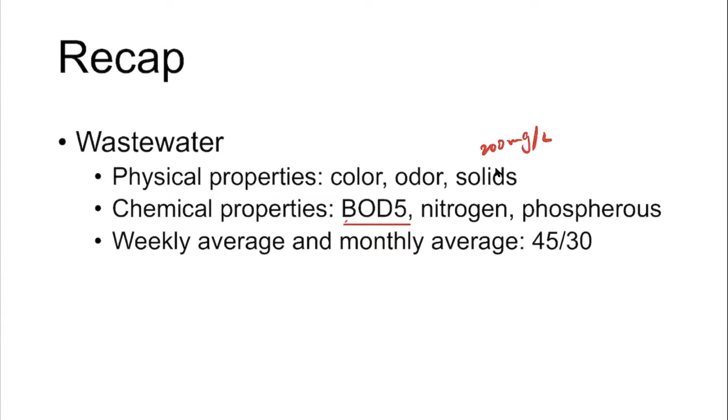And then in terms of the chemical properties, there are a lot of organics, so we have to measure the BOD5 and put regulations on what the BOD5 should be after we treat the wastewater. There are also nitrogen species, like ammonia or nitrate, which are major nutrients for algae bloom, and there's also phosphorus in the wastewater. So we have to deal with these nutrients before we discharge it back into nature.

That's why there are regulations. The EPA has regulations on what the concentration, or standards, should be for wastewater before we discharge it. A quite easy number to remember is this 45-30 number: 45 milligrams per liter, for both the BOD5 and the suspended solids.

So the 45 is the weekly average, and the 30 is the monthly average. We also introduced why these two average values are different—mainly because there are fluctuations in these contaminants. For example, BOD can have high values or low values. So if doing a weekly average, and it happens to fall in a high concentration range, we should use a higher standard. For the monthly average, we can use a lower standard as the regulation.

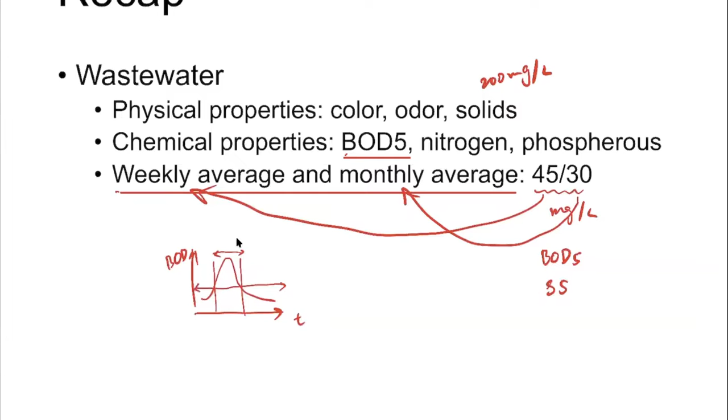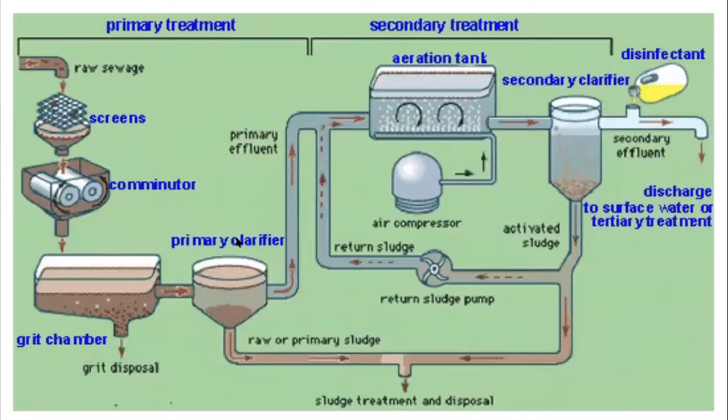And then we watched a video about how the wastewater treatment plant works. For this process, we mainly divide wastewater treatment into several stages: primary treatment and secondary treatment, and for some wastewater treatment plants, a tertiary treatment. So basically it's stage 1, 2, and 3 for wastewater treatment.

For stage 1, what happens is it directly deals with the raw sewage—the dirty wastewater. We pass it through the bar screens to first remove the larger particles, then through the comminutor to cut it into smaller pieces of solids, and then through the grit chamber to remove these medium-sized particles.

And then for these very small particles, we pass it through the primary clarifier. The primary clarifier mainly removes particles based on gravity—basically the particles are large, and because of gravity they settle down to the bottom and get collected.

And then the relatively clean water coming out of the primary clarifier—for the federal requirement, we have to do the secondary treatment process, meaning we pass this relatively clean water into a secondary treatment process, which is mainly the aeration tank.

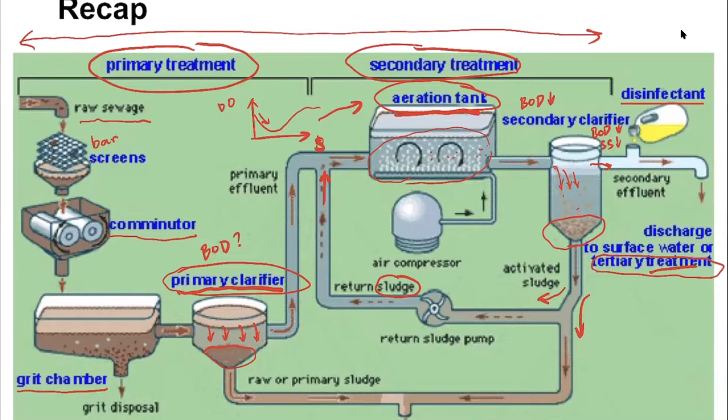This is the main idea of this secondary treatment. We're basically providing some bacteria with an unlimited amount of food and oxygen so that we can reduce the concentration of the organics. We're going to talk a little bit more about these different steps later in this class.

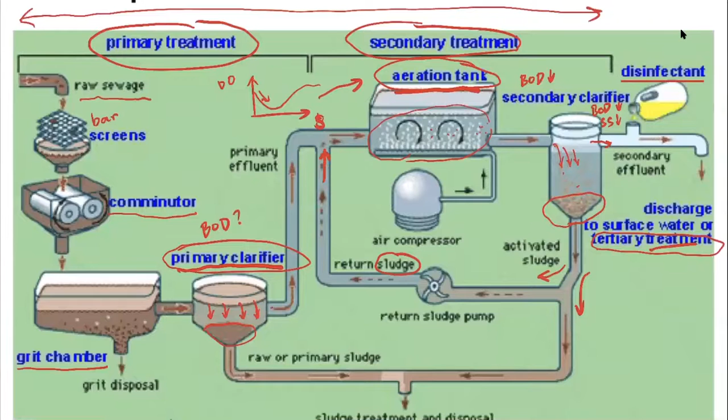Before that, since we already talked about the wastewater treatment plant, which is basically a centralized method to deal with the wastewater, we also need to introduce a counterpart that's not used for centralized water, but for distributed water. Those are called the on-site treatment systems.

The major difference is that a wastewater treatment plant is built nearby a city, dealing with wastewater coming from households or nearby industrial plants. But if people are living in rural areas, it's going to be very expensive to transfer their wastewater to a plant nearby a city. That's why people rely on these on-site treatment systems. It serves around 25% of the population in the United States, while 75% is served by wastewater treatment plants - so on-site systems serve a considerable amount of people in this country.

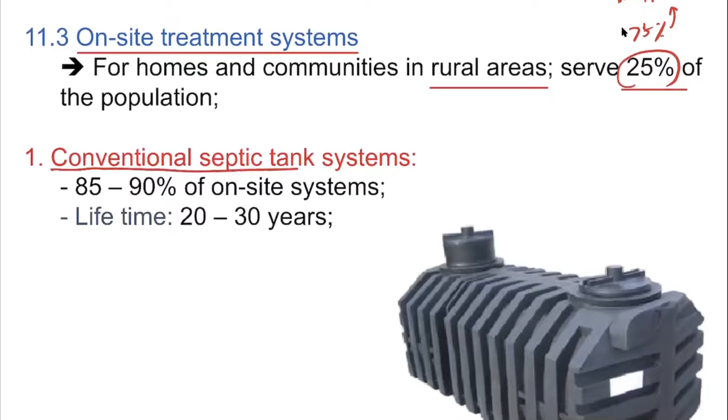Among all the on-site treatment systems, the conventional septic tank system is the most widely used, occupying around 85 to 90% of all on-site systems. It's also a very simple setup - it has one inlet and one outlet.

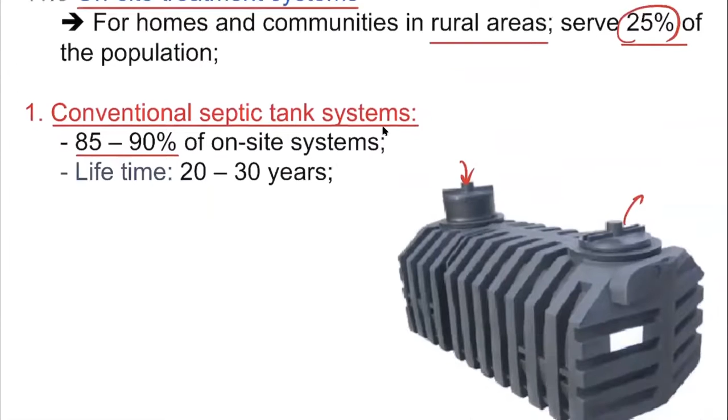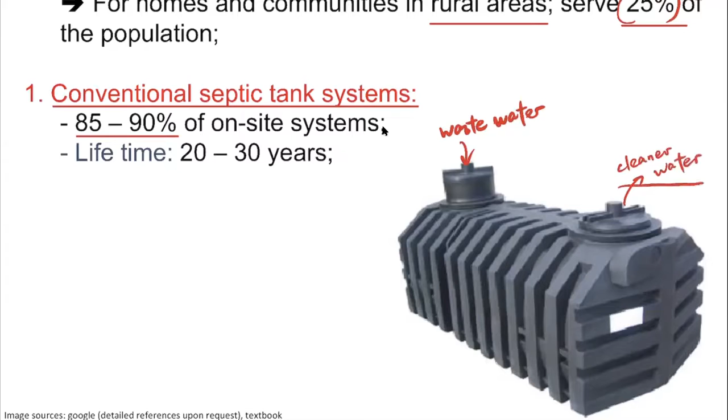You have dirty water in, which is the wastewater coming in, and then relatively cleaner water coming out. But of course this water is not going to satisfy any standard - it's definitely not drinking level. These septic tank systems generally have a lifetime of around 20 to 30 years.

The way it works is this tank is separated into two different regions, called two different compartments - you have the first compartment and the second compartment. The principle is very easy, it's just using the gravitational settling of the particles.

What happens is we have the wastewater introduced into the first compartment, and since we have a lot of suspended solids - very large particles - they're going to settle down onto the base. We call this sludge. Normally these tanks have a relatively large volume compared to the flow rate.

Let's imagine this septic tank is just serving one household - the wastewater generated from the household is not going to be very large in quantity. Because of this very large volume, the residence time of the water is going to be very long, so there's enough time for the particles to settle down onto the base.

And then in this first compartment, they can separate into different layers. You have the sludge layer at the bottom. You have the scum layer, which are some contaminants or pollutants that have lighter density, so they can basically float on top. And then you also have the liquid level. The liquid at the very top is going to be cleaner because the solids are too heavy and they settle down.

So this relatively cleaner liquid can pass into the second compartment, which uses the same principle. The larger particles settle down, and you get relatively cleaner water coming out. So then this is the outlet.

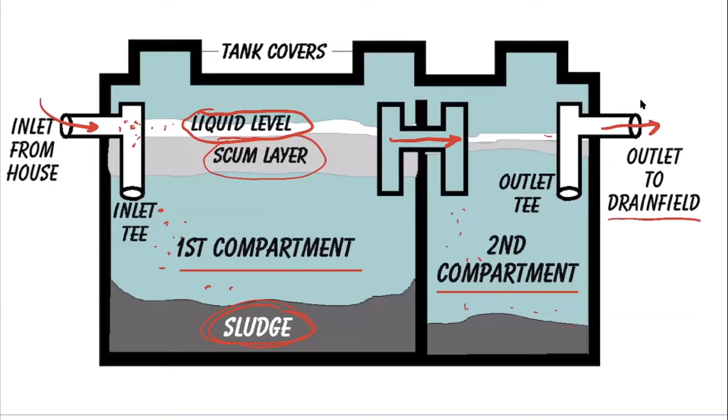After the water is discharged from this septic tank, normally people would just directly drain it, sending it to a drain field. What the drain field means is it's going to pass into a section of soil. The septic tank is normally built underground, and after the relatively cleaner water comes out, it goes into this drain field.

But a lot of the water, or some contaminants, are going to penetrate through the soil. If you recall hydraulic conductivity, this water can further penetrate through the sand layer, the soil layer, and further contaminate the groundwater.

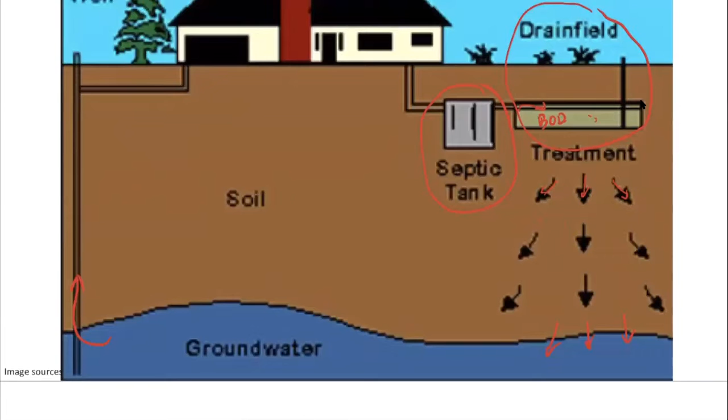And this is something we don't want to happen, because if there are some BOD or heavy metals in the discharged water, and people normally use the groundwater as their drinking water, then if the contaminants pass through here, we will have a problem.

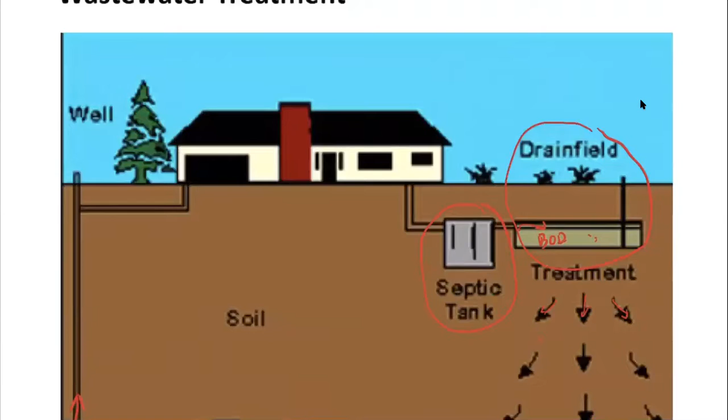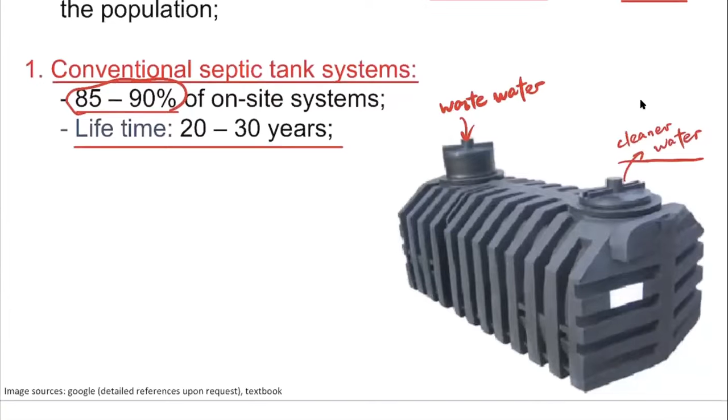So that's why people also try to revise the septic tank system. You can see that septic tanks actually serve a large population, about 85 to 90%. But because it may cause further contamination, people are trying to revise these systems. One example is the septic tank system with modifications.

In the wastewater treatment plant, one thing used to remove the BOD is the aeration tank, which is part of the secondary treatment process. We introduce a lot of bubbles, air, into the reactor and let the bacteria grow and consume the organics. We can use a similar principle here, adding aeration to try to reduce the BOD in the tank.

We can also use the recirculating sand filter system, similar to the drinking water treatment system. You have the sand filter to remove the smaller particles. We can use these sand layers to remove the small or medium-sized particles, while very large particles just get blocked at the top. This way, we cause less pollution to the groundwater, reducing the environmental burden of these very basic septic tank systems.

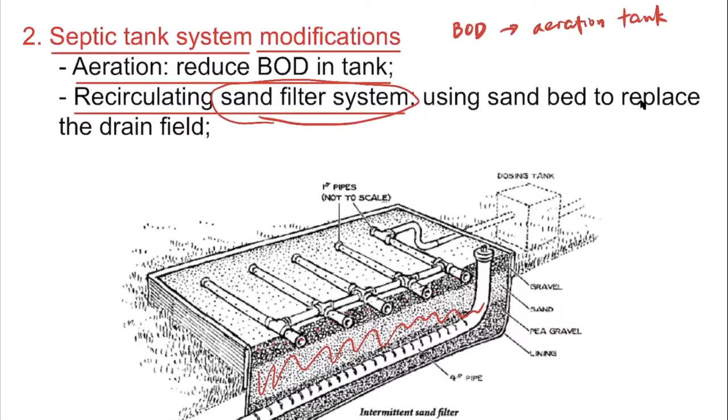Another system we can use doesn't have any compartments at all. This is generally for relatively cleaner wastewater, because wastewater has a lot of nutrients, like nitrogen or phosphorus, which we can actually reuse in plants. If we try to grow some crops, we can directly use them as fertilizers. But this also requires that the wastewater doesn't have a lot of organics, so the BOD generally needs to be low.

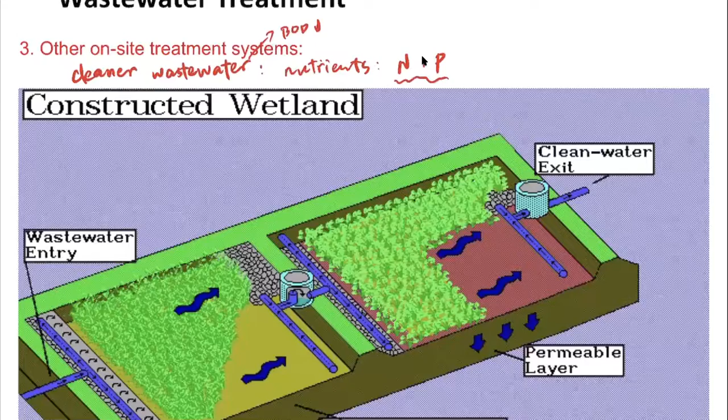So what we can use is a constructed wetland. The wastewater enters here, and we have the first layer, a first wetland growing some plants. The soil here blocks a lot of the particles, and these plants can also reuse the nitrogen and phosphorus, growing upon this wastewater.

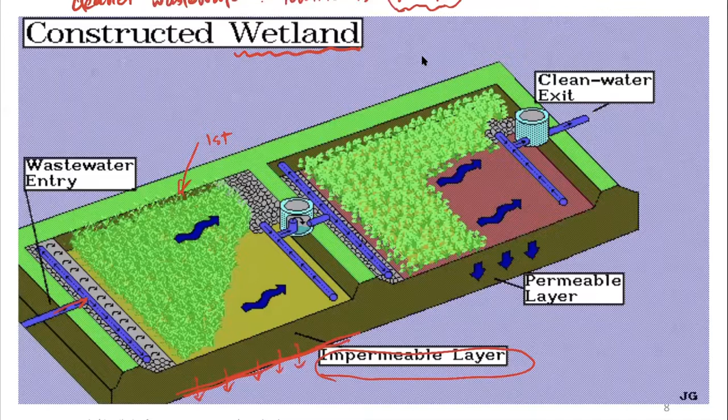At the same time, for this first compartment or soil layer, we use an impermeable layer, meaning at the bottom of this wetland we use rock that doesn't have any porosity, so it's very difficult for the water to penetrate down. If it's not easy to penetrate down, we can collect all of this treated water and send it into the second wetland.

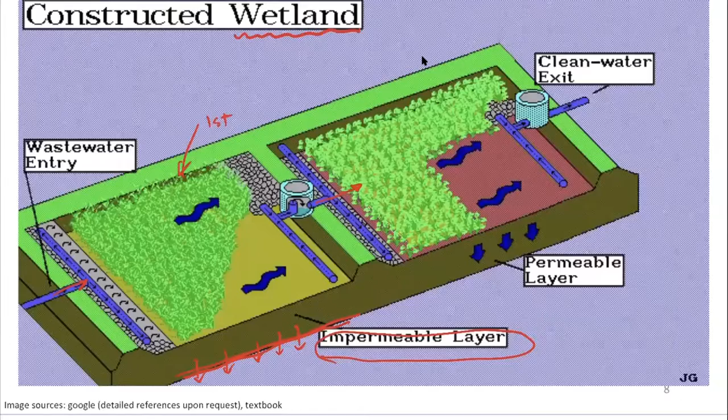In here we can further reuse these nutrients. And then here we can use a permeable layer because most of the solids and heavy metals are already trapped by the soil. There's no way they can further penetrate or go into the second wetland here.

So in this way, we're going to discharge relatively cleaner water down to the soil. So the pollution impact to the groundwater is also going to be smaller, right? So this one doesn't have any compartment here.

And further, there's a modification that's called the baffled bioreactor, or the BBR. The BBR generally looks like this, kind of like a trailer or a shipping box. Inside, it has a similar structure compared to the septic tank, but it's a little bit more complex in terms of how it treats the organics and how it treats the nitrogen.

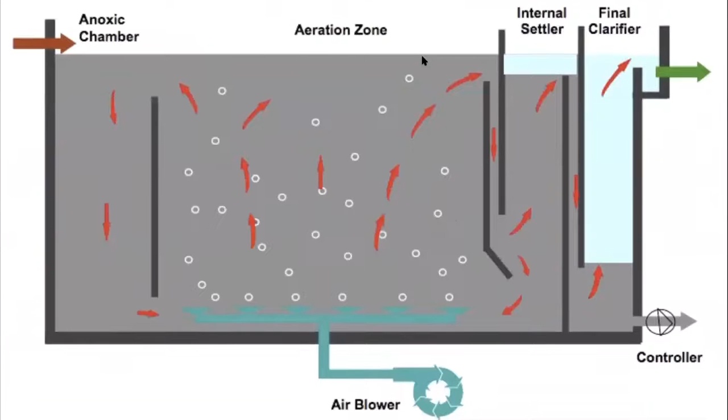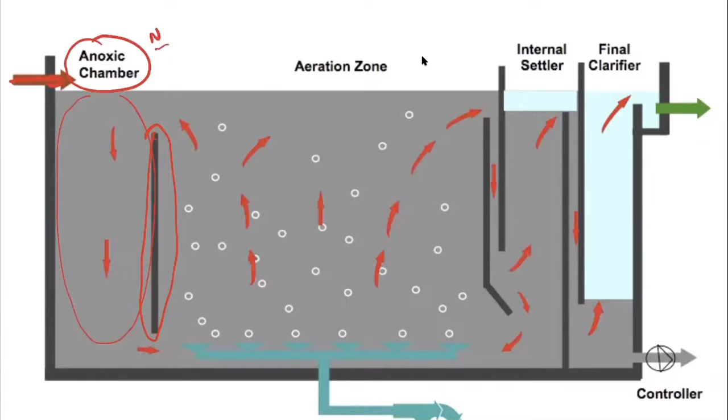In the BBR, people build different channels, different baffles, to regulate the flow of the water. For example, the wastewater comes in and first goes through this anoxic chamber. If you recall the metabolism section where we introduced ecosystems, the anoxic process is basically the process that consumes nitrogen. So the first process deals with the nitrogen species to reduce the nitrogenous pollution from the wastewater, converting either ammonium or nitrate into nitrogen gas. Then the water flows into the second compartment, which is the aeration zone.

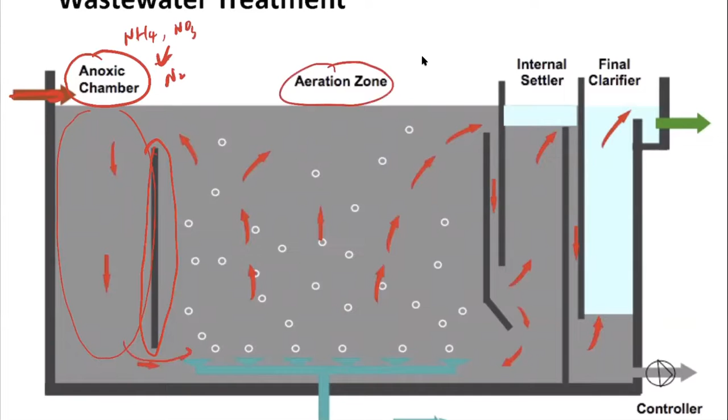This is similar to the aeration tank in the wastewater treatment process. We can bubble a lot of air into this aeration zone and also introduce bacteria inside. This is going to remove the BOD in the wastewater.

And then we have these channels to further regulate the flow, so that the water can only go from this channel here, then down, then up, and then down again. Basically, we're elongating the trajectory of the water, so it can stay longer and have more time for the particles, let's say the suspended solids, to settle down onto the bottom.

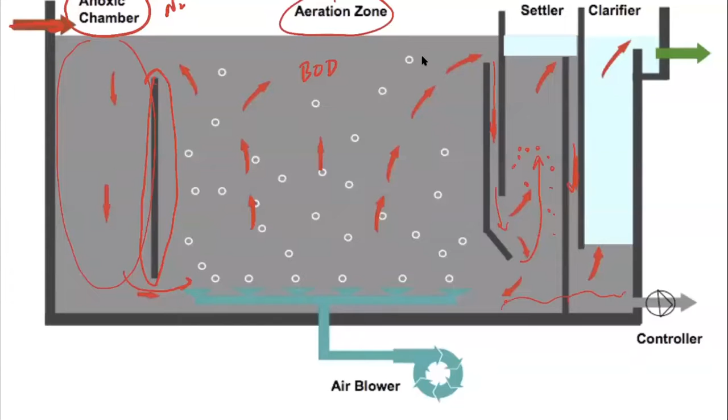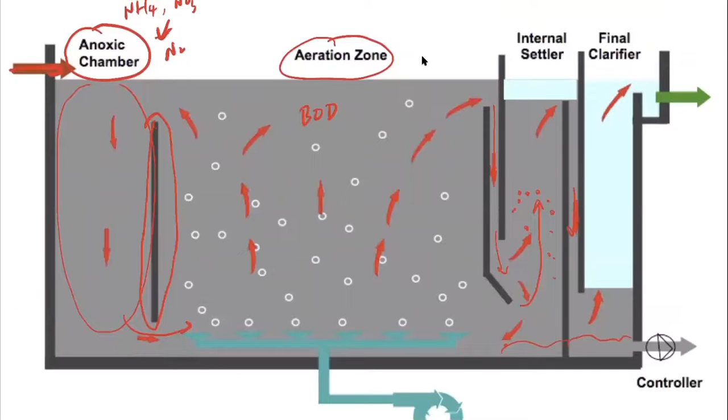Finally, after the water passes through all of these baffles and channels, in the final channel or final clarifier at the top, the water quality is much cleaner compared to what's coming in. So it's very similar to the septic tank, except that you have much more processes happening within this single chamber.

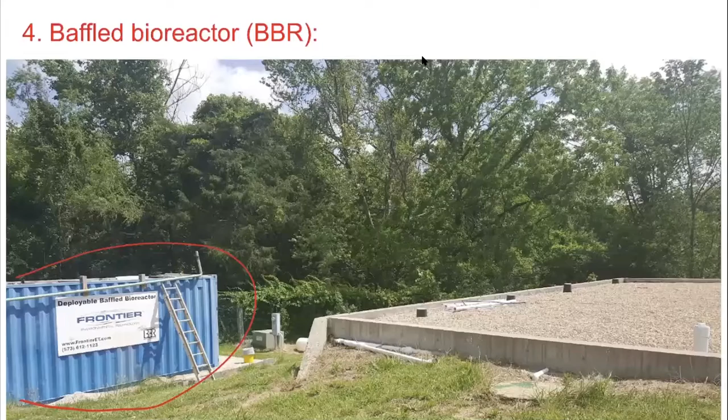I have to mention that this idea of the BBR is patented by Dr. Jianmin Wang in our department. He has a company that actually produces these baffled bioreactors, and it's being applied in many, many facilities. His company is called Frontier Environmental Technology, so if you're interested, feel free to hop on his website and take a look.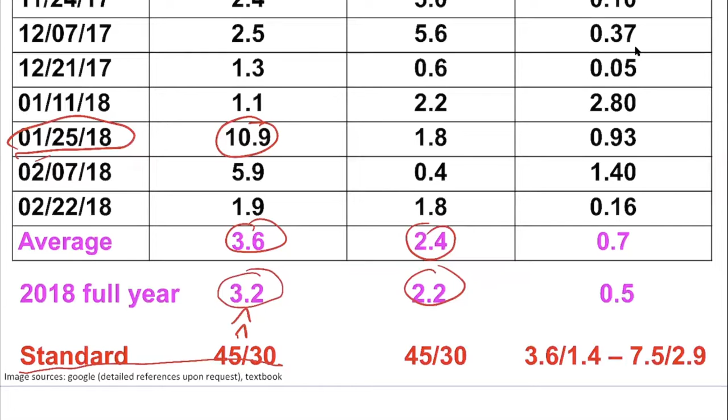So not only can it treat the BOD5 and suspended solids, as we mentioned, it has the anoxic chamber, so we can deal with ammonia and nitrogen species. The concentration is also relatively low compared to the EPA standard.

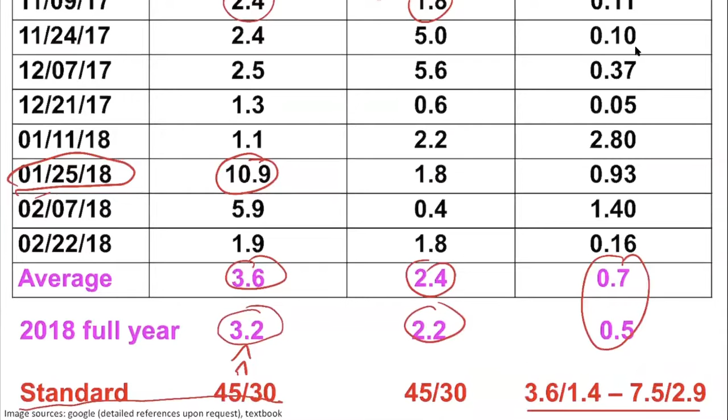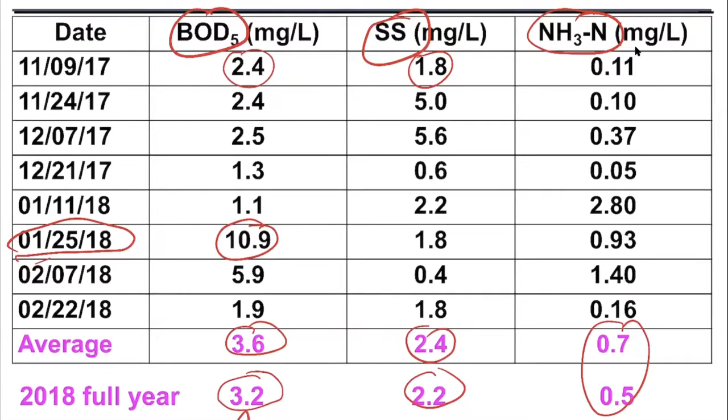So basically, these are all the on-site systems. As you can see, the on-site system, because it's serving less of a population and also in terms of capacity, it's smaller since it's normally just serving one household. So the process is relatively more simple, and at the same time you can have different processes, or similar processes compared to the wastewater treatment plant, and combine them into this compact system.

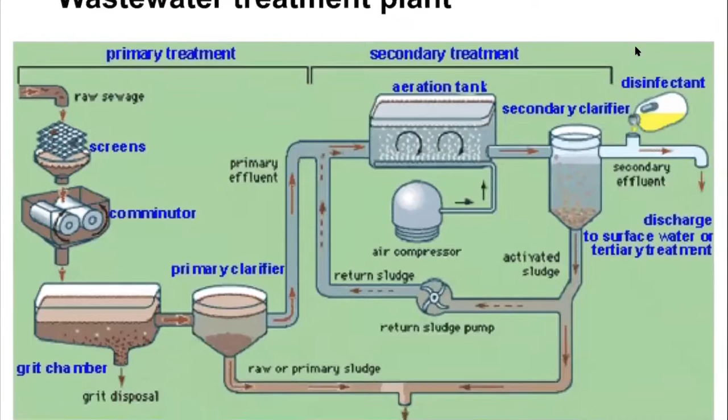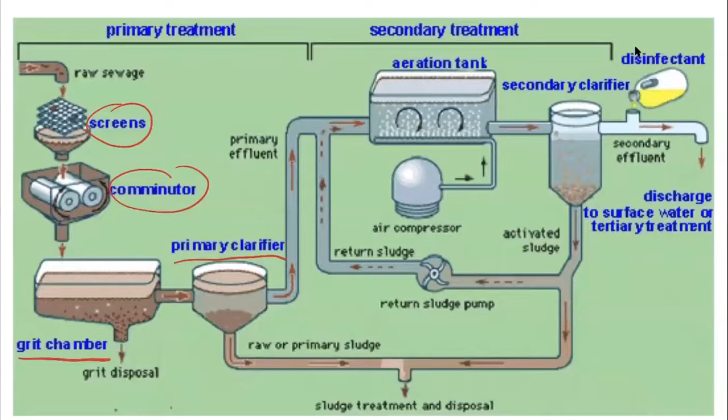So now let's come back to the wastewater treatment plant, and we can spend a little bit more discussion on each of these processes. As we mentioned, for the primary treatment we have the bar screens, the comminutor, the grit chamber, and the primary clarifier. And for the secondary treatment, we have the aeration tank and the secondary clarifier. These are the major processes we're going to talk about.

So first is the bar screen, or bar racks. This is generally the first stop of the wastewater treatment plant. As you can see, these bar racks basically work as filters, except that they have very large openings.

It's 5 to 40 millimeters, which is a very large gap here. This is mainly dealing with the larger species or larger contaminants.

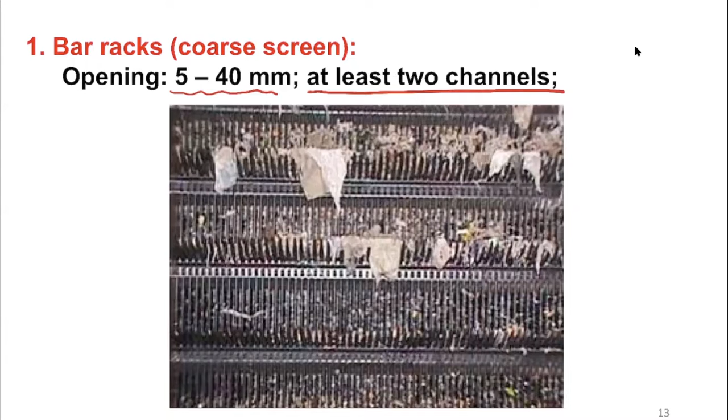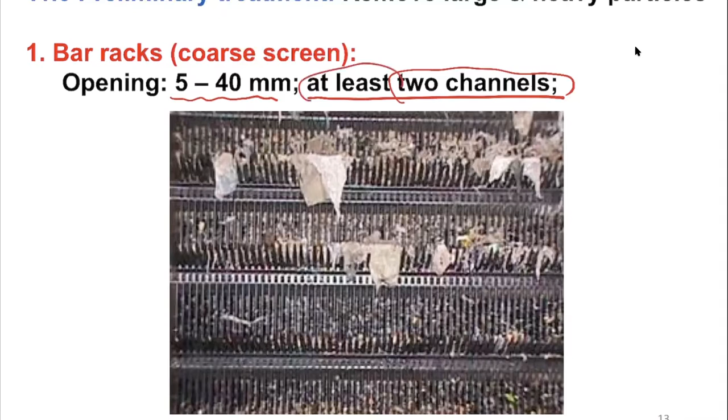At the same time, people need to build at least 2 channels because it's very easy to block one of the channels—you never know what people are going to dump into the wastewater stream. So there needs to be at least 2 channels, mainly because if one channel gets fully blocked, the other channel can still work. And if you have more channels, that will be even safer in terms of treating the wastewater.

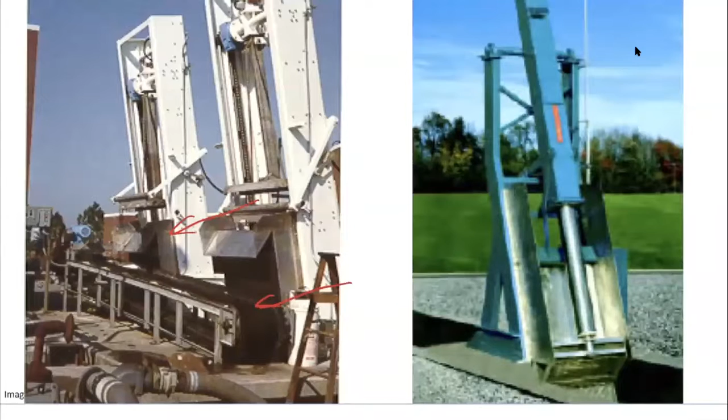Here it's showing 2 bar screens or bar racks, so the wastewater can flow from either of them, or both at the same time. You can pull them—basically dip them into the water—and after some time, when you feel it's blocked, people can measure the flow downstream of this bar screen. If the flow is too little, then you're going to pull this bar screen up and remove these larger contaminants. As I said, you never know what people are going to dump into the wastewater.

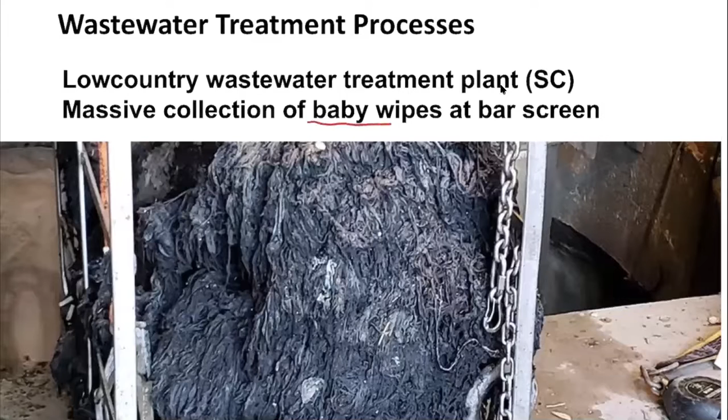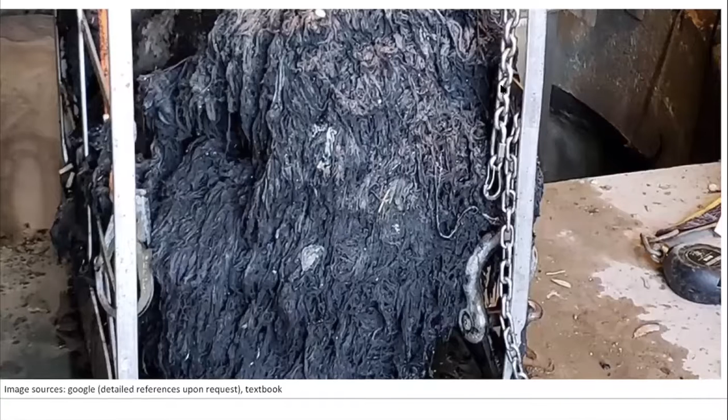Here I'm showing a picture that actually made the news regarding the wastewater treatment process. In South Carolina, there's a wastewater treatment plant called the Lowcountry Wastewater Treatment Plant. I think in 2018, they made the news because the plant had to shut down, mainly because people found a massive collection of baby wipes at the bar screen. So now you can see what kind of burden this bar screen deals with—the baby wipes are pretty large, and if you have a large amount there, it's going to completely block these screens. Then the whole treatment plant has to shut down all the inflow of wastewater and try to remove these contaminants. So the bar screen is dealing with these larger species.

What happens is, while we're transporting the wastewater through the channel or through the pipes, we can also create a flow that lets the water spin around. If you imagine particles in this wastewater, because of this spinning movement, it's going to create a centrifugal force. So the larger particles spin to the outside of the channel, and here you can have this hopper, basically to let the particles settle down in this collection region. Different designs for the grit chamber have different locations for the hopper—they can also be located here or here as well.

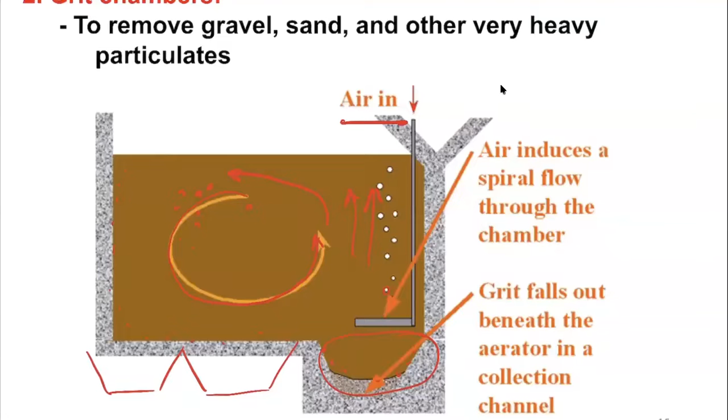The method we use to create this spinning flow is by introducing air from a pipe. If we introduce air in here, we're going to generate a lot of bubbles. The bubbles try to float up, and that's going to drag the water to go up, but the water cannot come out—so the water can only diverge in this way, creating this spinning movement. Based on this mechanism, we can remove particles of larger sizes and further purify the wastewater.

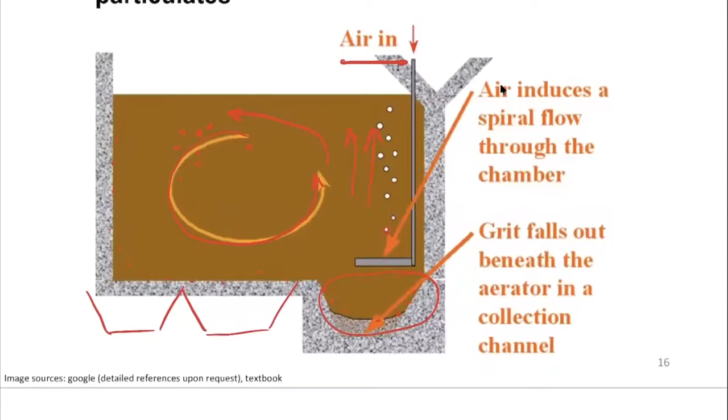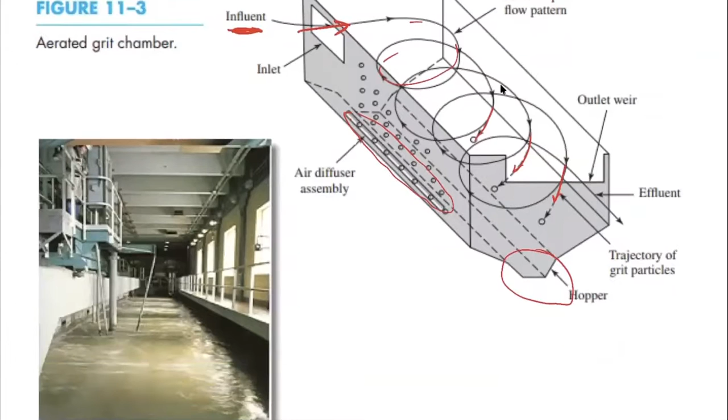Here's how the channel looks: the influent or inflow can go from here, and since you have this air diffuser generating bubbles from one side, you create this spinning movement, and the larger particles get spun to the outside. Then you can have the hopper at the bottom to collect all of these larger particles. You can also imagine this is actually a quite convenient way to clean the water, because we have to transport the wastewater anyway—the water has to flow in pipes. You cannot directly connect this primary clarifier downstream of the bar screen; you have to transport it somewhere else. So while the water is being transported, you can introduce this spinning flow to remove these larger particles.

This picture is showing the grit chamber and how it looks. The water is going to flow in this way, and you can generate bubbles from one side of it, so the water spins the other way around.

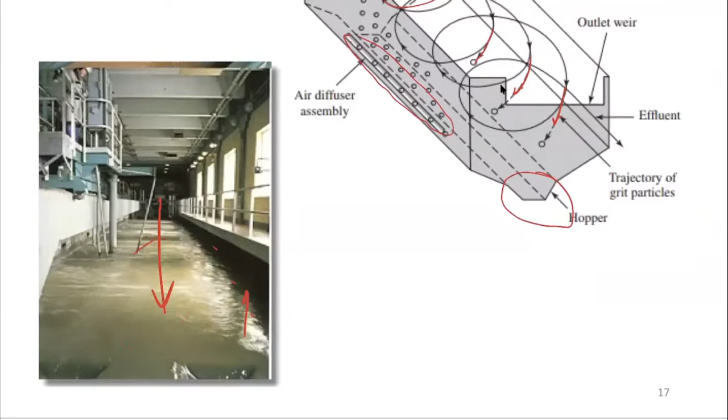Get spun, and then particles can settle down, right? So this is the grit chamber.

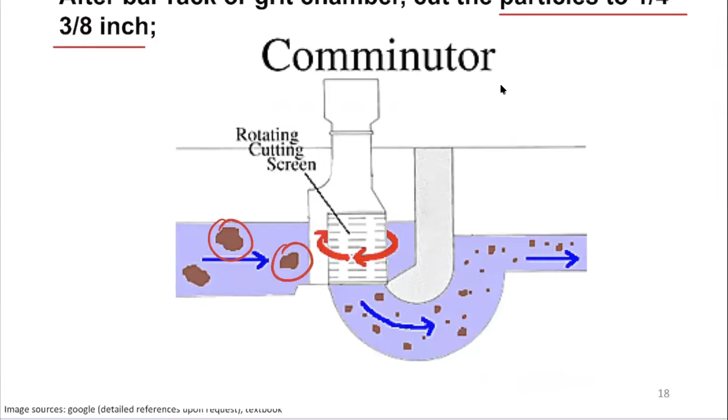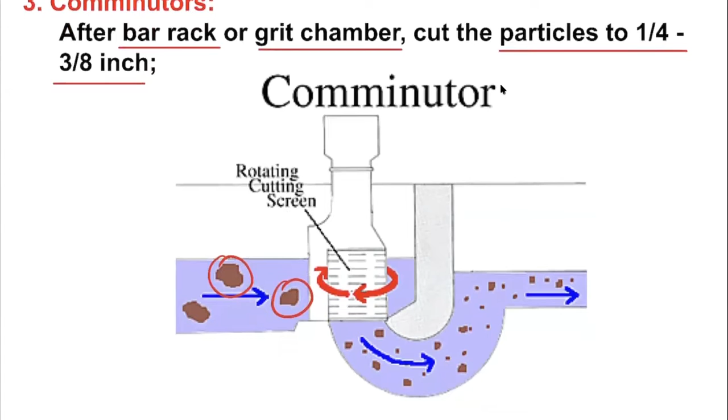There is also a device called the comminutor. The comminutor tries to cut the relatively large particles or particles of medium size into smaller ones, basically cutting them into 1/4 inch or 3/8 inch sizes, crushing these larger suspended solids into smaller ones. The comminutor can normally be placed either after the bar screen or after the grit chamber, depending on how large these suspended solids are. After they're broken down into smaller pieces, we can remove them more efficiently.

In industrial wastewater treatment process, people also design a system called the equalization tank. The main idea is if we try to plot the flow rate of the wastewater coming out of industry, normally these industries work during the daytime and shut down during the nighttime. So during the daytime, you're going to see a peak of this discharge in terms of the wastewater.

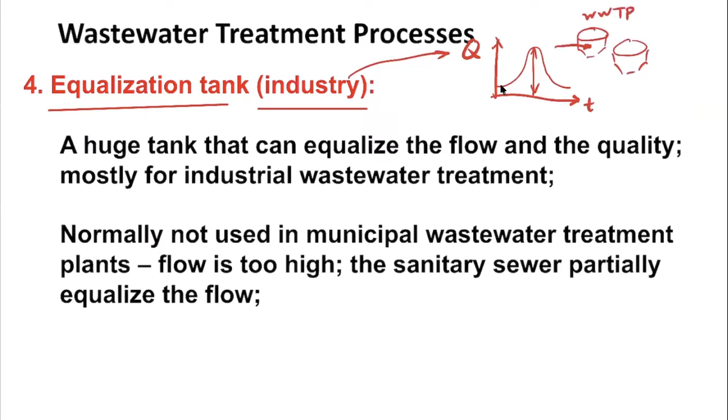But if you're talking about a wastewater treatment plant, let's draw some clarifiers here. The flow rate going into the wastewater treatment plant has to be constant. If the flow rate is too high and not constant, the water might get overwhelmed, flow out, or get flooded. So this flow rate has to be a constant flow rate.

But in terms of the industry, they can have a very strong variation based on the daily trend or the hourly trend. That's why for a wastewater treatment plant dealing with industrial wastewater, we build a very large basin or tank called the equalization tank.

What happens is the industry directly discharges the water into the equalization tank, and then the wastewater treatment plant only pulls the flow out of the equalization tank. In this way, you can guarantee a relatively constant flow rate, because if the flow rate is very high, it's just going to increase the liquid level in the tank, not increase any flow rate going into the treatment plant.

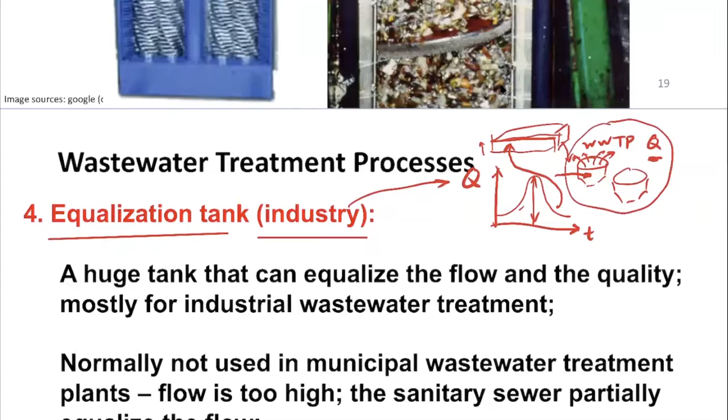So it's kind of like a buffer, so you don't overwhelm the water treatment plant. Basically, the equalization tank is a huge tank that equalizes the flow and the quality. Not only the flow rate, but also the quality, because during the daytime in the industrial plant they can generate wastewater with very high BOD, but at night the BOD may be much lower. So in this equalization tank, you can also homogenize the water quality.

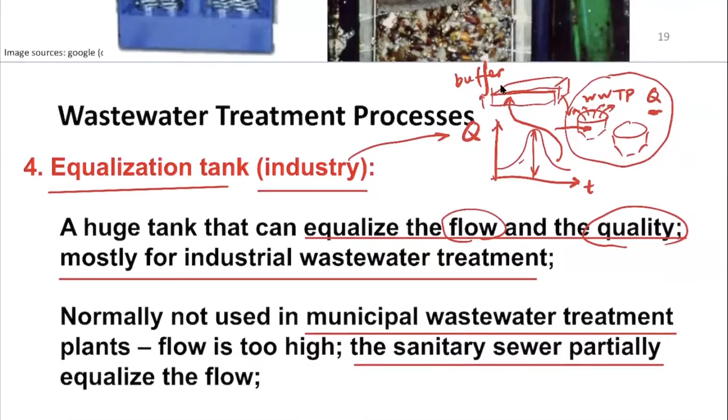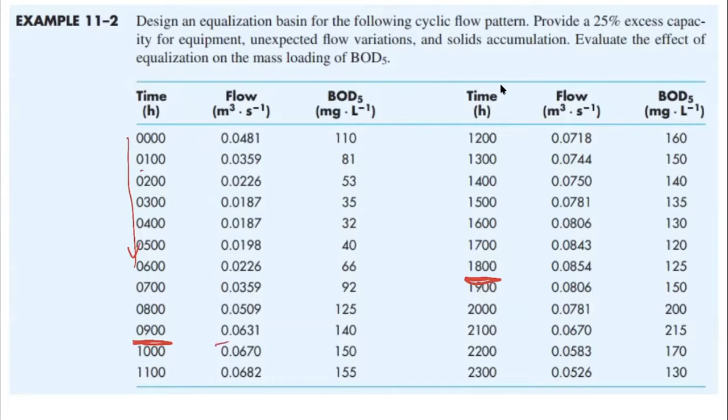So this is the equalization tank. And here I'm also showing a schedule for the flow rate for the industrial plant. Based on the time of day, in different hours, during the daytime, let's say starting from 8 o'clock to 6 p.m., you can see that the flow rate is normally the highest during the daytime, and the flow rate becomes lower overnight. That's why we need to design these equalization tanks to act as a buffer for the wastewater treatment system.

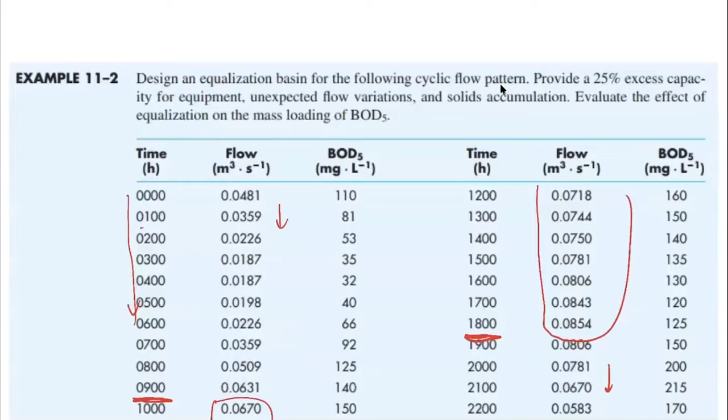So as I said, the final stop for the primary treatment or first stage treatment is the primary clarifier.

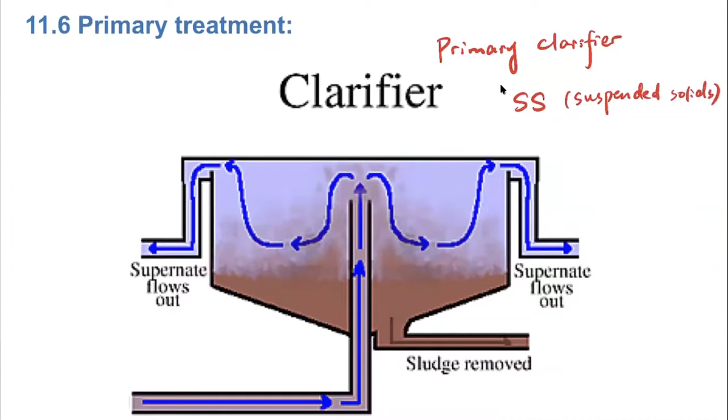Okay, so the primary clarifier, as I said, it removes the suspended solids purely based on gravity.

So what happens is we're going to introduce the pre-treated wastewater, let's say after the bar screen, after the comminutor, after the grit chamber, into the primary clarifier. We're going to introduce them from the center.

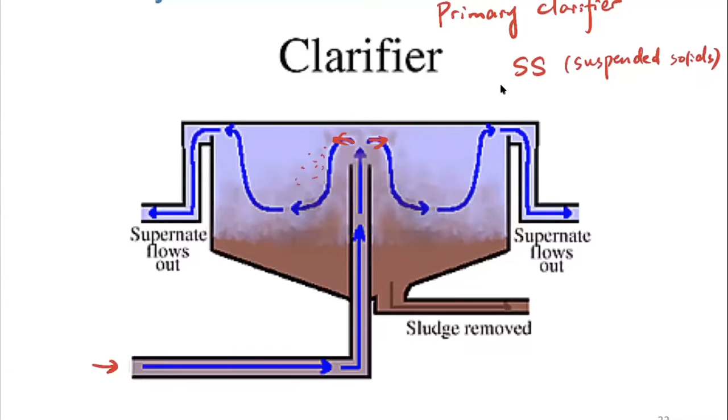The water is going to flow out, but at the same time, these suspended solids are going to drop down because of gravity. And normally for this primary clarifier, they're going to stay for a very long time, what we call the retention time, for several hours.

The several hours of the residence or retention time is going to be quite sufficient to let us remove these larger suspended solids and let them settle down onto the base, and further, at the edge, what people call the weir wall.

So the relatively cleaner water can come from the outside, from the top. We also call this flow the supernatant flow, basically the cleaner flow at the top, and we can collect them and send them into the secondary treatment.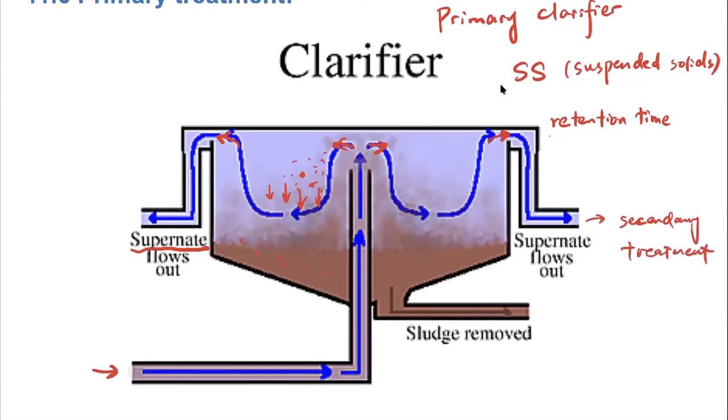As I said, the retention time is a quite important parameter. We want to basically let the water stay for a relatively long time. So the retention time is calculated just based on the volume divided by the flow rate.

It's very similar to the water treatment system, if you imagine what is the average, what people call either the characteristic time or the residence time, or the retention time. So it's basically just the volume divided by the flow rate.

If you check the unit, the volume has a unit of meter cubed, and the flow rate has the unit of meter cubed per second, so you get a unit of seconds. So the retention time is purely based on the volume and the flow rate of the wastewater.

But at the same time, this primary clarifier removes particles by gravity. And in water treatment, we have a very similar device called the sedimentation basin. I think we had several homework problems or exam problems on this design. The sedimentation basin removes solid particles based on gravity, after the coagulation and flocculation processes.

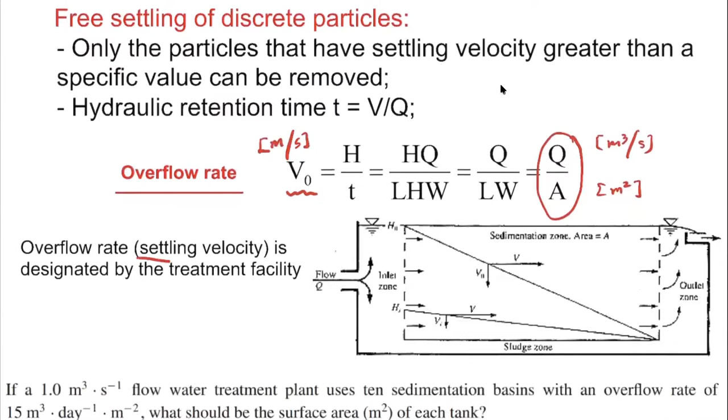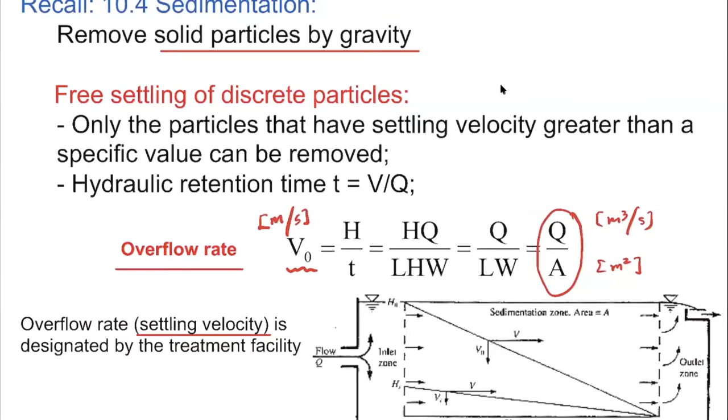This is a definition from the sedimentation basin. Since the primary clarifier is using the same principle in terms of removing the solids, we're using the same set of parameters to design the primary clarifier.

So if we go back to the primary clarifier, these are generally the design parameters, and you can see that we use the same name in terms of the settling velocity. We still call it the overflow rate.

You can have the primary clarifier that has the shape of rectangles, quite similar to the sedimentation basin. You can also have circular ones, which are just a round one, and then basically it's the same as the schematic diagram that I drew earlier, this one, the circular ones.

Here is listing some typical dimensions, and we don't need to really memorize all of these, because you can see that they can be built in a very large range of dimensions. It really depends on what type of devices we're looking at.

In terms of the overflow rates or settling velocities, normally the average overflow rate is around 25 to 60 meters per day. And if you have a very large wastewater flow, then the peak overflow rate is around 80 to 120.

The peak, basically, the flow cannot be further higher based on this condition. If it's above 120 meters per day, then it's not going to be efficient to remove the smaller particles. Also, in terms of the retention time that we talked about, it's normally 1.5 to 2.5 hours.

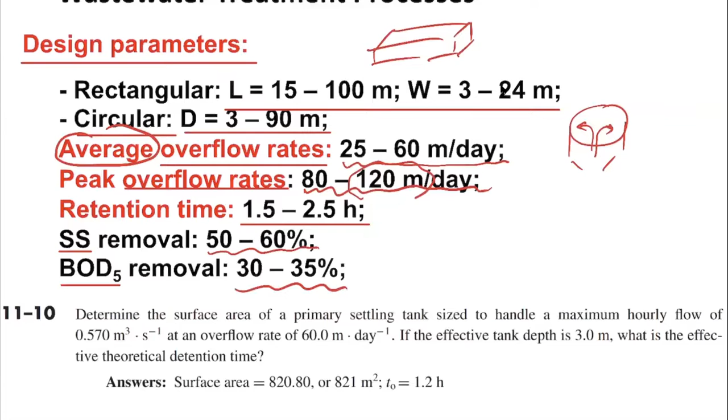So here I have an example problem. I think we can use this example to quickly know how to design these primary clarifier systems.

So it wants us to determine what is the surface area of a primary settling tank or primary clarifier that's sized to handle a flow rate of 0.57 meter cubed per second and an overflow rate of 60 meters per day. You can see that this value is within the range of the average overflow rate.

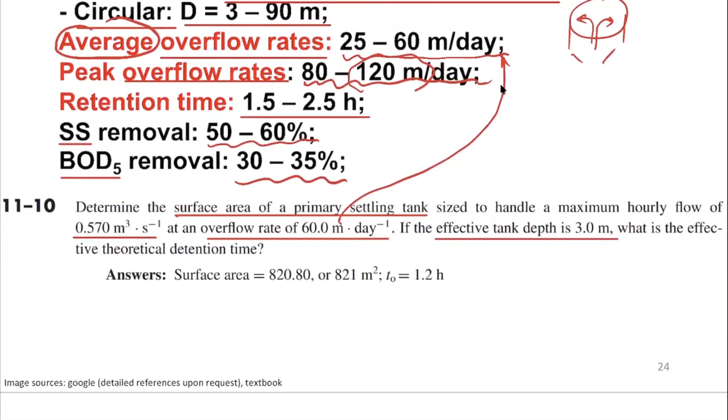It's also asking, if the effective tank depth is 3 meters, what is the retention time or the detention time? You can see that for this characteristic time, people really use a lot of names.

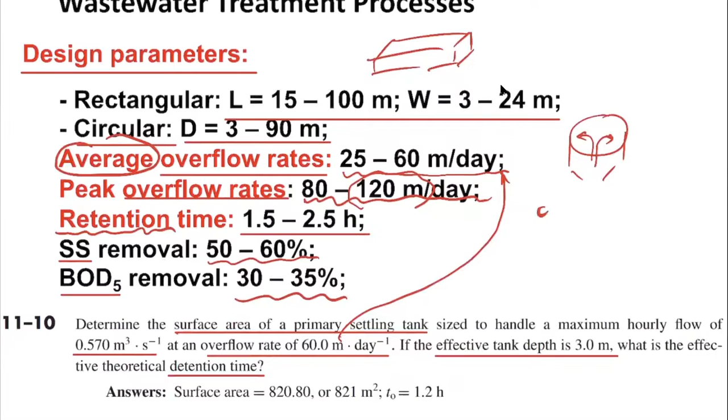Let me just write it out so that we don't mistakenly treat it as a separate parameter. So we can call it the characteristic time, or we can call it retention time, or detention time, or the residence time. They are all the same thing.

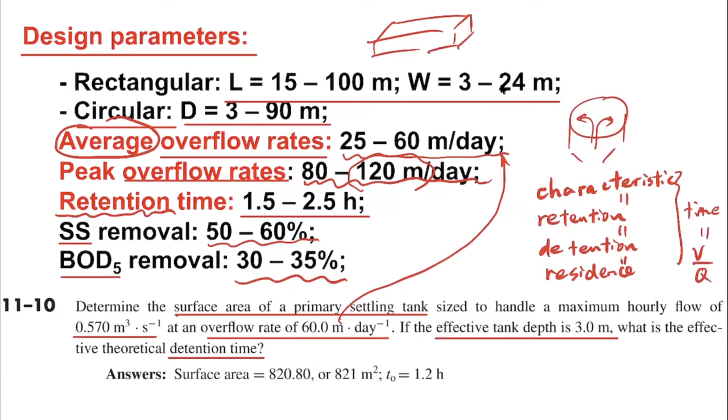It is calculated by volume divided by the flow rate. Now if you look at this example problem, basically we have the overflow rate, which is 60 meters per day, and we have the flow rate, which is Q. If you recall, the definition of the overflow rate is the flow rate divided by area.

That's basically 0.57 meters cubed per second, divided by area. For this problem, it's asking us what is the surface area. So we can directly rearrange this equation, which gives us 0.57 meter cubed per second divided by 60 meters per day.

But we should also pay attention that here the time units are different - one is seconds, one is days. So we have to multiply this by 24 and then 3,600 to convert days per second. You plug in the value and find out that this answer is 821 square meters, and this is the surface area.

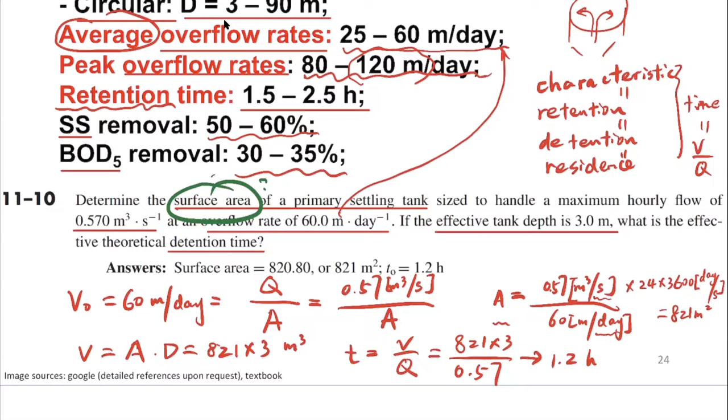Now I think we can have a quick quiz. If I ask you, what is the master parameter for the primary clarifier design? Let's take a choice here. I'll give it 10 more seconds.

Okay, let's stop here. Most of you are correct - that is the surface overflow rate. As we said, this is the critical settling velocity of the particles. We use that to design the surface area, and we use that to design the dimensions of this primary clarifier. You can see that this primary clarifier is very similar to the sedimentation basin in the water treatment process.

So this is a primary clarifier, and we can introduce a little bit about the secondary treatment process. As you can see from the overview of the wastewater treatment process, the secondary treatment uses a completely different principle to remove the contaminants. All the processes earlier are based on the physical process.

We either filter them out or let them settle down based on gravity. But the secondary treatment uses the biological method. We introduce microorganisms into the wastewater to remove the organics and also the nutrients from the water stream. That involves the metabolism of the bacteria or microorganisms - it's using all of the biochemical activities.

The metabolism is further divided into catabolism and anabolism. These are just basic definitions, we don't have to memorize them, but the major difference between these two forms is that catabolism is consuming the food, consuming the organics, while anabolism involves the construction of the cell - it's increasing the population.

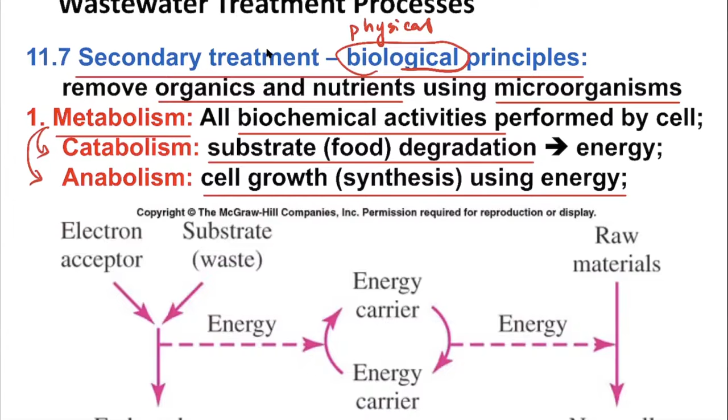It's like for a human being, we use catabolism to basically generate heat, when we try to study, when we try to exercise, but we also use anabolism to refresh our cells - we're always growing new cells. So these are the two forms of metabolism. We also use that to grow these bacteria and remove the BOD in secondary treatment. We're gonna stop here.